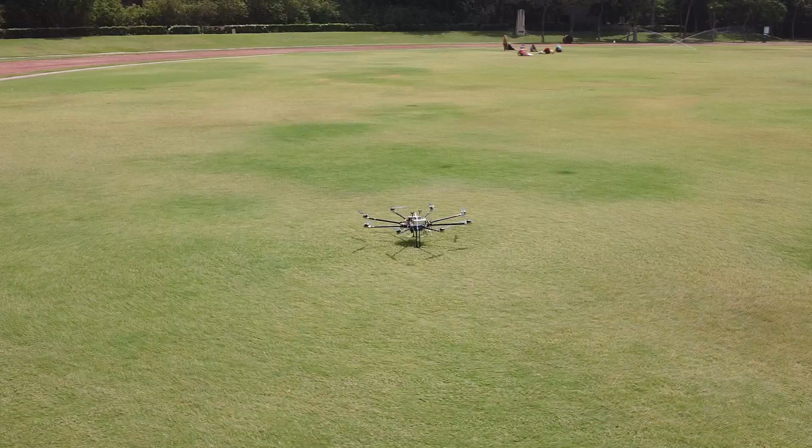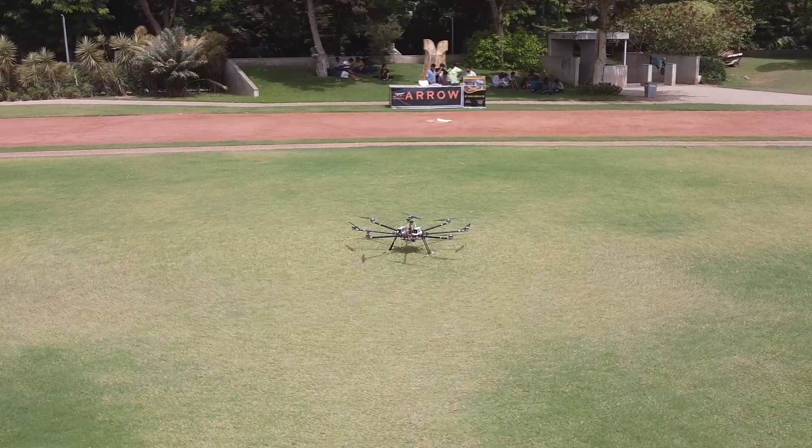This year, the team has decided to go with a multi-rotor design, specifically an octocopter configuration, which has been designed and fabricated following extensive research and development. Integrating rigorously tested subsystems, the team was able to develop a UAS capable of surpassing the challenges laid out by the AUVSI SUAS while still being in compliance with the competition regulations.

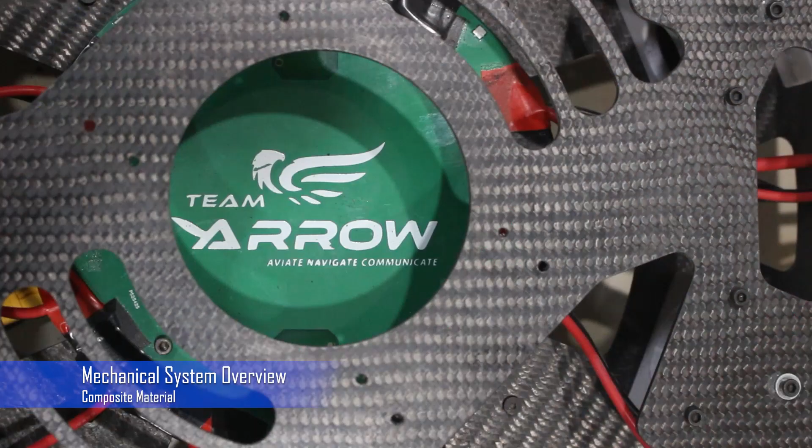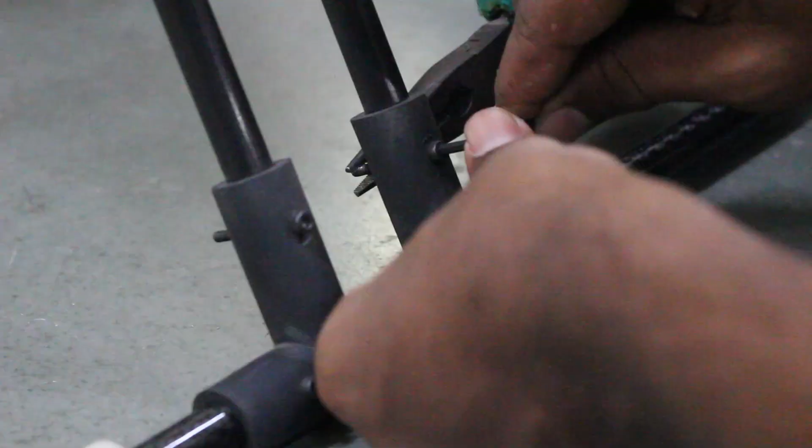Mechanical system overview. Various composite materials were considered and ultimately carbon fiber was chosen due to its lightweight and high strength to weight ratio. The landing gear upon which the UAV rests was built using carbon fiber, MJF nylon, and silicone. A completely different and unique design was chosen for the landing gear mount. This was possible by implementation of generative design, which maximized stiffness for the least mass possible. To ensure smooth landing, silicone shock absorbers were used.

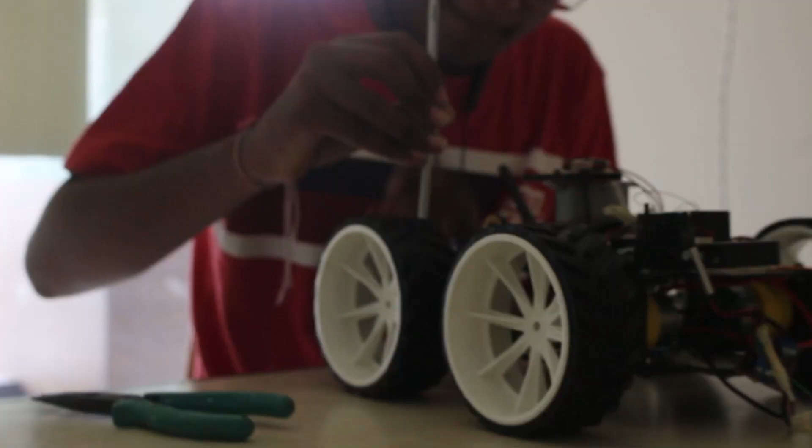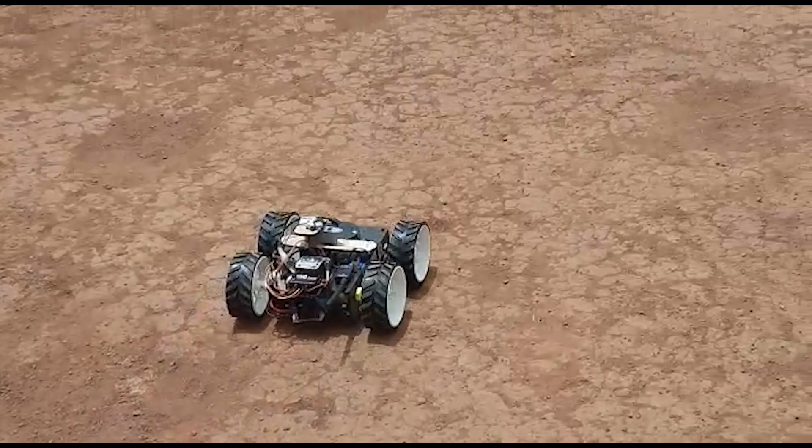Our unmanned ground vehicle for the task of payload delivery is airdropped through a winch mechanism. The UGV is made using the same carbon fiber as used in the UAV. Our design and construction ensure good grip and are effective on both sand and gravel terrain. An antenna tracker was developed using stepper motors and 3D printed parts.

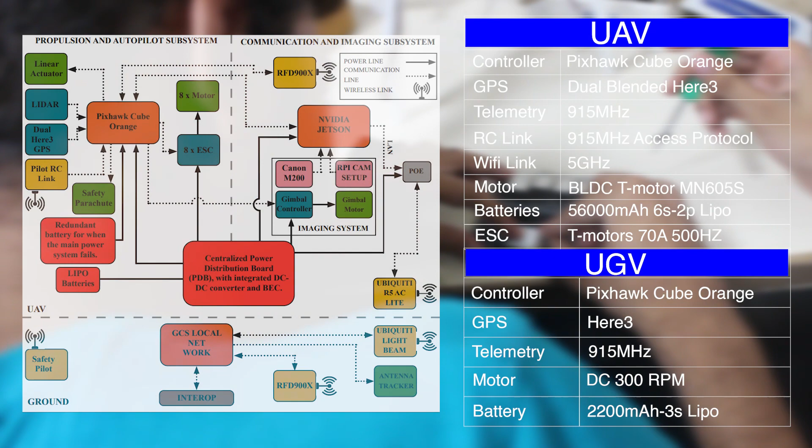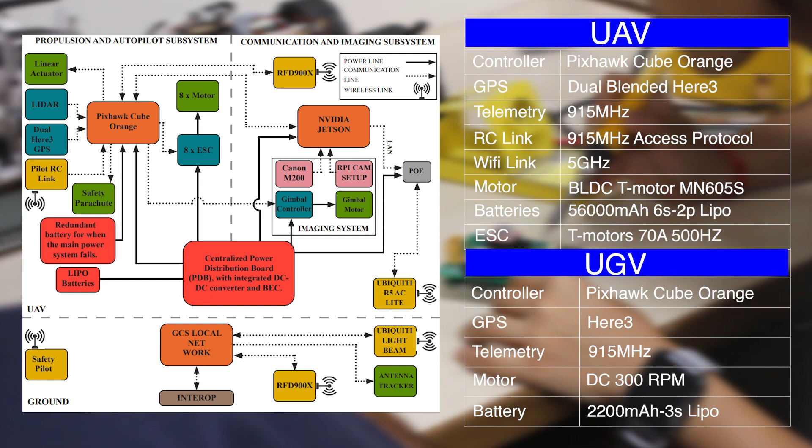Electronics System Overview. For autonomous flight, PixhawkCube Orange with Here 3 GPS is used. A similar configuration is used for the UGV as well. For the imaging system, Canon EOS M200 is interfaced with the Jetson Nano, which deals with capturing images, geotagging, and file encryption. For communication, Ubiquiti Rocket 5AC air module and Ubiquiti LiteBeam 5AC ground module are used.

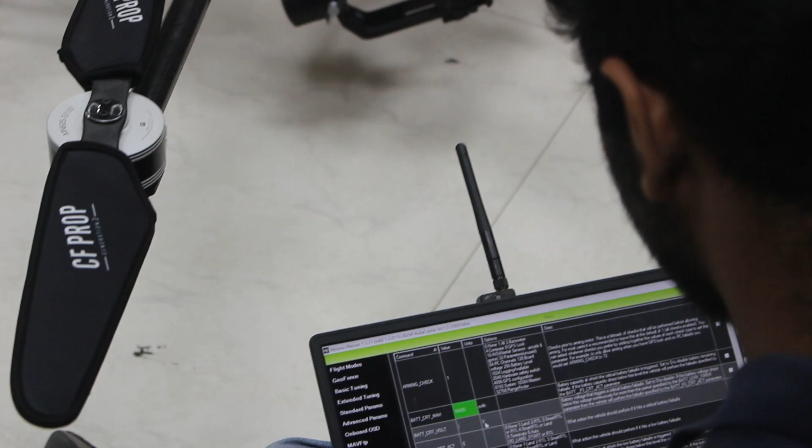Software System Overview. The team chose Mission Planner as its ground control station as it offered great support for customization, was reliable, and the team had prior experience with it. The team also uses OpenDroneMap, an open source photogrammetry tool, to stitch all the images captured by the imaging system and form a map based on the geotags.

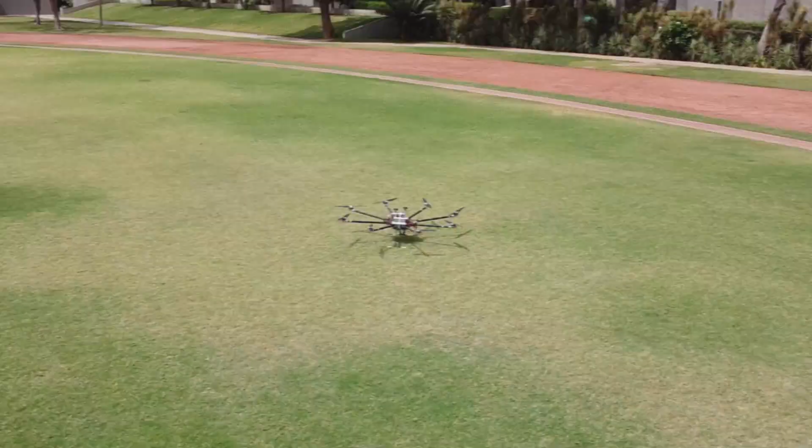This year, the team is planning to attempt the following: autonomous flight with high confidence, object detection and classification with high confidence, object localization with medium confidence, static obstacle avoidance with high confidence, not attempting dynamic obstacle avoidance, mapping with high confidence, airdrop with high confidence, and UGV drive to location with medium confidence.

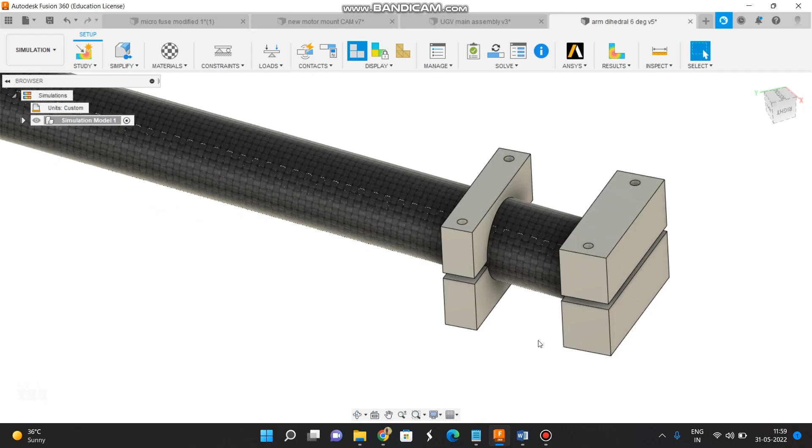The arms of the UAV are made of hollow carbon fiber rods held between 3D printed PETG clamps. Thus, they needed to be tested under the highest possible loads and checked for deformation and maximum stress. The maximum deformation obtained was 3.408 mm with a factor of safety of 3. This ensured the design's airworthiness.

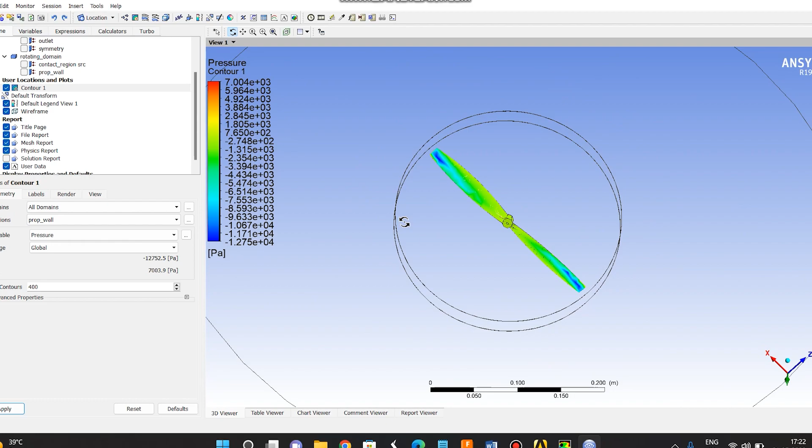The team also ran propeller thrust bench tests to validate the UAV's expected thrust to weight characteristics. A CFD analysis was also run on the octocopter's propeller to further validate the aerodynamic characteristics of the octocopter.

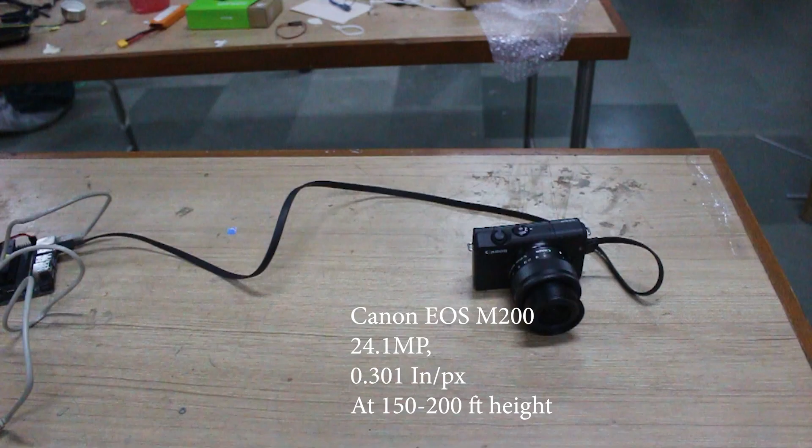The main camera is coupled with the Jetson companion computer. The imaging system handles image capture, geotagging, and file encryption. The photos are then resized and transferred to the GCS via the Ubiquiti Wi-Fi link.

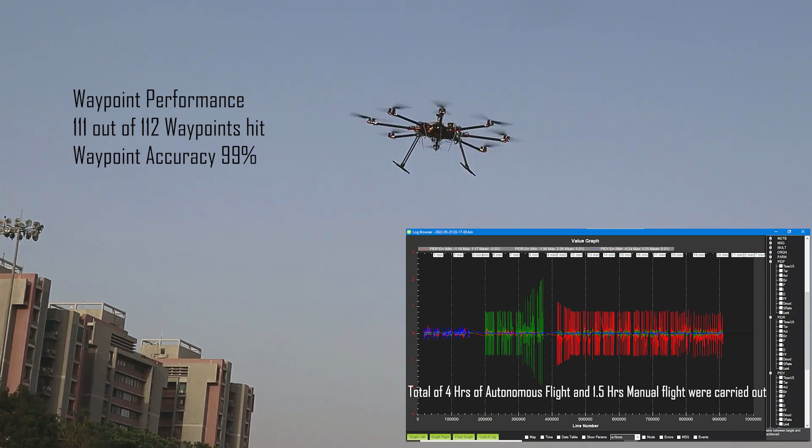After meticulous testing of the autopilot, the team successfully performed auto-tuning of the UAV to get the PIDs well tuned and for the vehicle to achieve impeccable takeoffs, cruising, and landings, ensuring upright flights even in extreme weather conditions.

The team has developed a GUI-based Python program that supports image cropping and detection of its characteristics. The team will also be geotagging the image. The geotagging of each image has been triangulated with an accuracy of up to 7 meters. An error of around 15% on average was detected when compared to the actual GPS location, which was obtained through a phone.

The test was conducted on around 48 images for the autonomous ODLC task, and the team found that the total accuracy of the algorithm is 70%. The alphanumeric has an accuracy of 76%. The color has an accuracy of 83%. The shape has an accuracy of 92%.

Due to insufficient accuracy and negative scoring, the team shall not be attempting the auto ODLC this year.

The team developed an ODM-based implementation. On average, a usable map is obtained in 7.2 plus or minus 1 minutes. An inpainting technique was also developed in case of information loss and stitching errors, which works as a pre-processing step for the Mercator wrapper. The open source ODM proves to be an industry standard, sufficient for the tournament's high standards.

The companion computer retrieves the GPS data concurrently while triggering the camera. The picture is data stamped and sent through the Wi-Fi, producing a map of superior quality.

The team offered a novel empirical analysis of 5 different motion planning algorithms and decided on a hybrid imitation learning approach. A CNN LSTM network was trained and experimented with various expert algorithms for the behavior cloning paradigm.

A simulation platform was then created mimicking the tournament's obstacles, based around objects following variable radii and superimposition. But in the end, the classical path planning algorithm A* was used to compute the path.

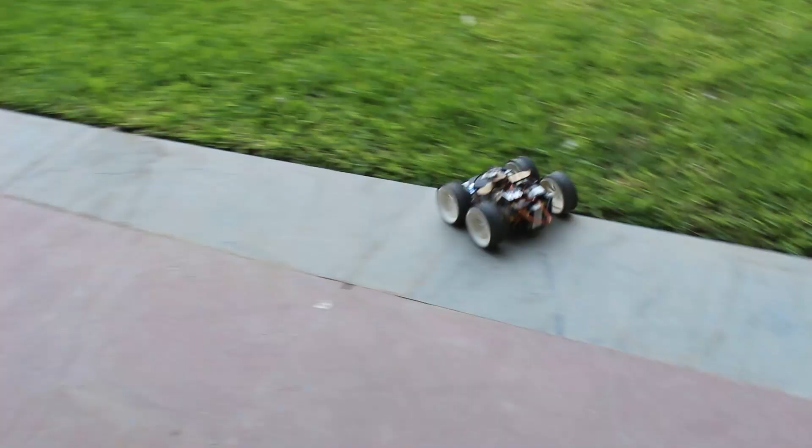2 linear actuators are then used, each on the UAV and the UGV, to minimize oscillation and ensure timely release of the payload. All systems were individually ground tested.

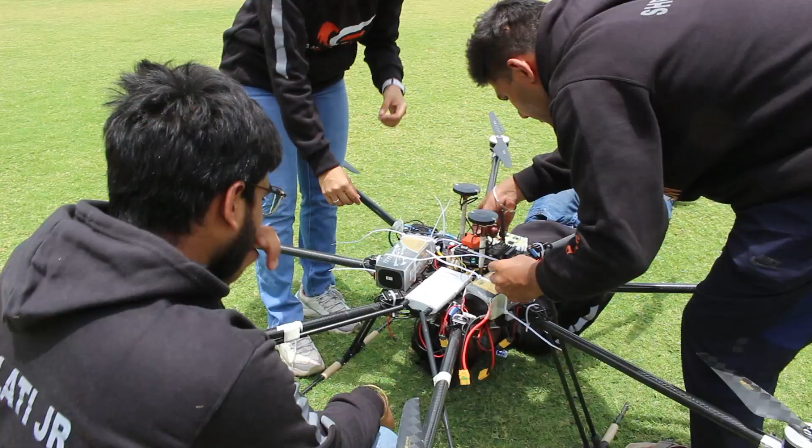Following that, full system bench tests were performed on integrated systems. After integrating all the subsystems, full system flights emulating competition tasks were flown and performance was evaluated. Each revealed flaws and necessitated process refinement in order to broaden the team's overall reach.

The team found out that it needed to work on the UAV's stability and mainly on increasing the endurance. The focus was then diverted to reducing the overall weight of the UAV.

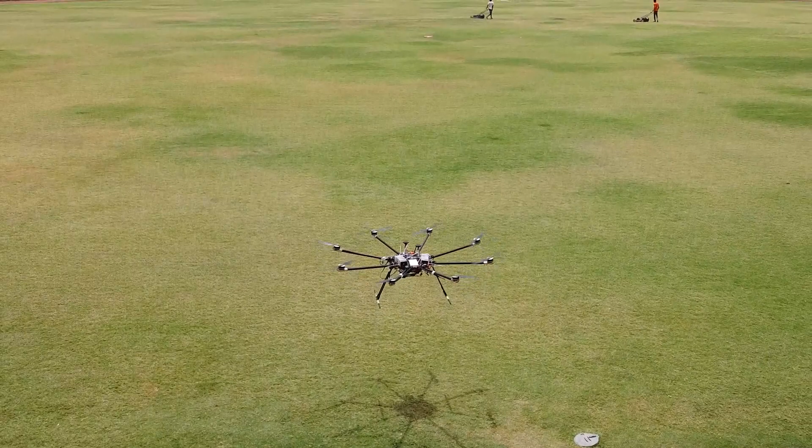The team also attempted to complete all the tasks within the stipulated time but fell short on the post-processing time. Thus, optimization of the post-processing methodologies was required.

Pertaining to the Wi-Fi link, there was a loss of data packets, as a solution to which the team developed an antenna tracking system.

The team was especially concerned about the UAV's stability while performing the airdrop. The winch mechanism was fine-tuned to drop the UGV in a controlled manner in accordance with the UAV's state.

Firstly, the UAV was auto-tuned and the winch mechanism was tested with a dummy payload, ensuring sufficient thrust-to-weight ratio required for the drop. Then the UAV itself was also tested to be airworthy in case of any instability caused due to the drop.

Geotagging of the image had an error due to latency in data transfer between camera shutter operation and GPS data retrieval. Thus, the team worked on an algorithm which compensated for this by calculating the latency and geotagged the image accordingly. Various safety checks and protocols were developed and implemented.

This ensured that there are no unforeseen accidents at the flight line. The team has also prepared for various fail-safes such as geofence breach, communication loss, GCS malfunction, etc.

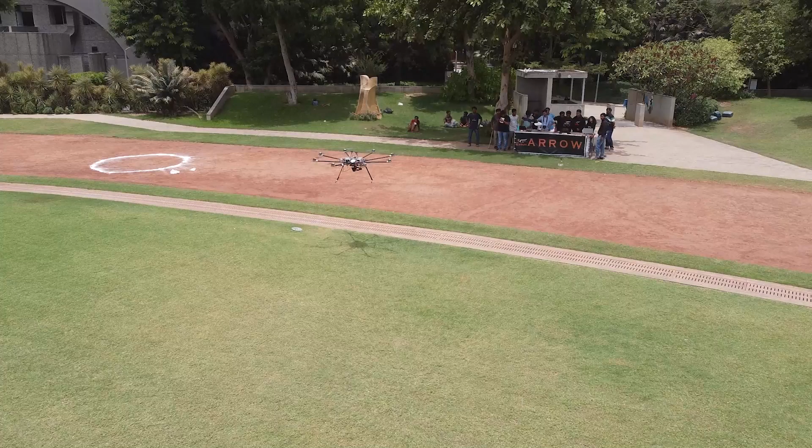To overcome these, the team has designed a UAS with a high degree of redundancy on the UAV as well as the GCS. These practices have instilled a sense of professionalism and situational awareness within the team pertaining to the competition.